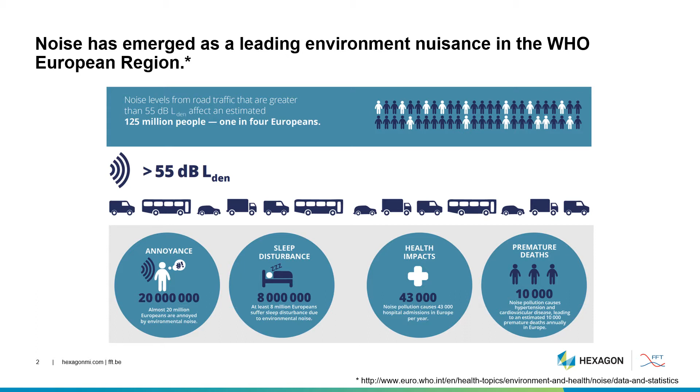The way that this has been addressed so far is by introducing regulations, especially in Europe, which has lots of different stringent regulations. The European Union cares a lot about the environment in most cases.

There has been a very strict pass-by noise limit, and we can look at this limit evolution in the following chart, where starting from the 1970s, the first legislation was passed for pass-by noise, and the limit was set at 82 decibels in the A scale.

After 20 years, the noise limit was reduced to 74 decibels, which is a very big decrease in noise pollution. After a few more years, it was further reduced in 2016 to 72, in 2020 to 70, and there will be a new regulation coming in 2024, where this will be further reduced to 68 decibels.

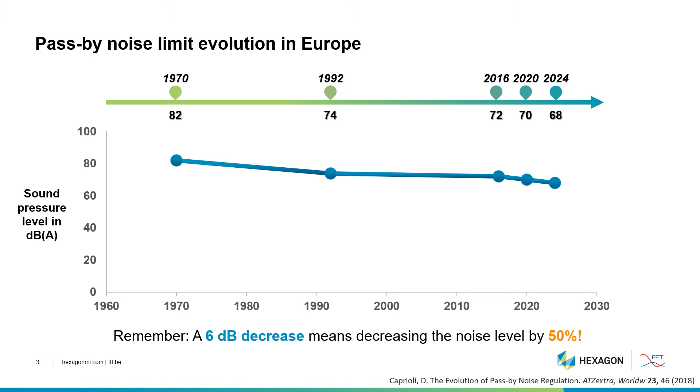So you can see that from the 1970s up to the 2020s, which is about 50 years, we have had a decrease in the noise level regulation from 82 to 68 decibels, which is 14 decibels. And you have to remember that a 6 dB decrease means decreasing the noise level by 50%. So this is really a huge effort that is being placed on reducing pass-by noise.

Now, of course, looking at this from the OEM point of view, from the constructor point of view, very often they treat acoustic design in two ways. One of these can be regulations: do we need to comply with a specific regulation to allow us to put our vehicle in the market?

And the second is that right now, very often customers, meaning drivers and passengers, treat vehicles as a product and need them to have very good acoustic performance. So acoustic comfort is treated as a feature. In any case, in this webinar, we'll talk about pass-by noise, which is mostly related to regulation.

So let us right now look at pass-by noise regulation compliance. Let's start our journey in this topic to see what the regulations are, how we measure pass-by noise, and how acoustic simulation can help us comply with pass-by noise by reducing costs and doing that even faster. Let's first look at how we measure pass-by noise overall.

This is done based on the procedure described in the ISO 362 standard, where a vehicle has to cross a 20-meter measuring zone, which in its middle has, at a distance of 7.5 meters, two microphones, one on each side. As the vehicle goes through the zone, the microphones capture the noise level.

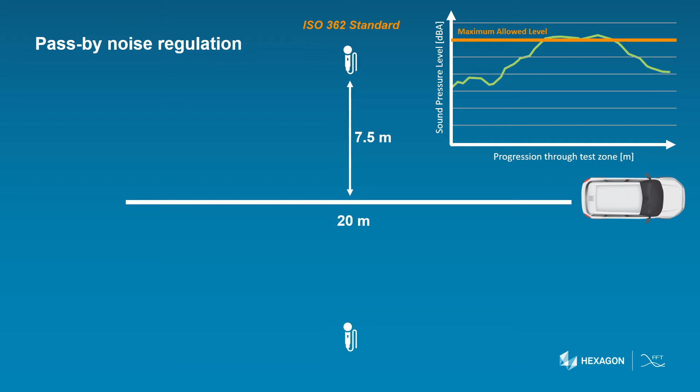The challenge is that most of the time, this type of test comes very late in the development process, because you actually need a real vehicle to do it. So this is really at the end of the process. Also, it's a very expensive test to perform—a few tracks that you will need to go to for this type of testing—and it's very hard and costly to make changes late in the development process, which is a very important point.

So we need to be able to do these types of tests a bit earlier in the process, so we can actually have compliance with the regulation once we are there and doing the test.

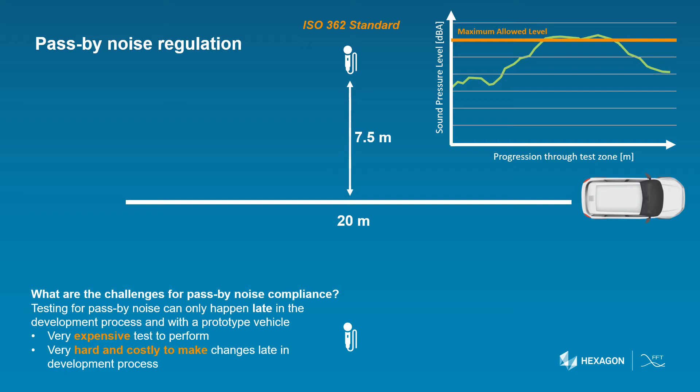Besides the full vehicle noise, we can also separate this into different parts which make noise in reality. Not everything in the vehicle makes noise, but there are some parts which contribute more to the overall noise level. This tends to be, in most cases, the engine, the exhaust, and the tires. There are also other parts, of course, but these tend to be the most predominant sources of noise for pass-by noise.

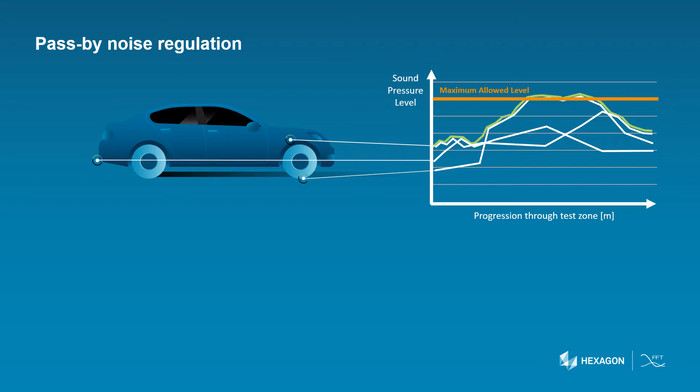Since we're dealing with linear acoustics in reality, we can easily decompose this problem, the absolute noise level that we need to find, into two specific different problems. One is related to the noise source, meaning tire noise, engine noise, exhaust noise. The second is about how this type of noise propagates to the microphone, meaning what is the acoustic transfer function - what is the pressure at the certification microphone due to an excitation from the exhaust. If we recombine those together, then we can get the absolute noise level.

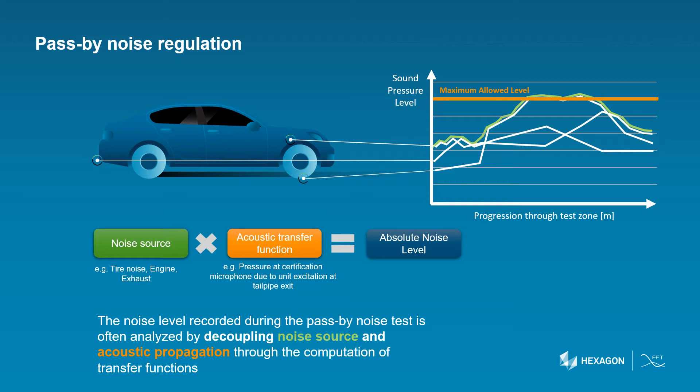This type of approach can help us be more flexible in how we evaluate pass-by noise, especially when it comes to simulation, but also with tests as well. The noise level recorded due to the pass-by noise test is often analyzed by decoupling noise source and acoustic propagation through the computation of acoustic transfer functions, as I mentioned above.

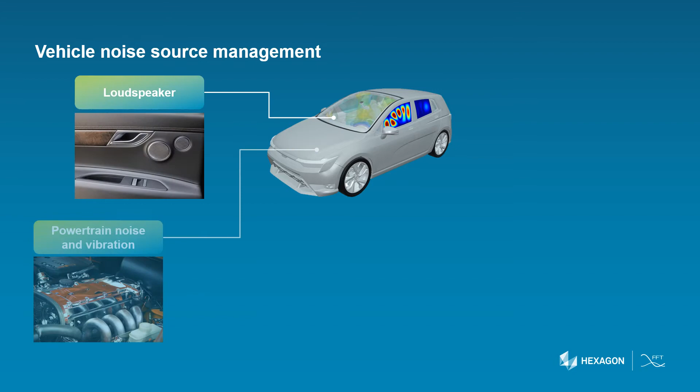Let us talk a bit more about vehicle noise sources. Here I put a number of different noise sources, but the most predominant ones in terms of exterior noise tend to be the powertrain noise and vibration, tire noise, road vibrations very often, and exhaust noise. This is because very often we can hear that, but in most cases, exhaust noise, tire noise, and powertrain noise will be the most important parts.

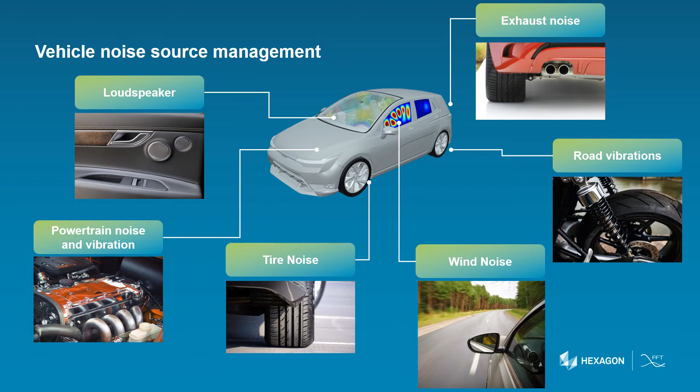Loudspeakers are mostly for the interior comfort. Wind noise is again more from the interior point of view - it's not very easy to have exterior noise that is because of the wind. So in this presentation, we will mostly talk about powertrain noise, tire noise, and exhaust noise.

Now that we have an idea about how we compute our noise sources, we can go ahead and see how we can simulate these noise sources and also the acoustic transfer functions, or how simulation can help us do pass-by noise evaluation.

At first, we need to ask ourselves, why do we need to do simulation? A very obvious answer is that since the test is very expensive, we have to do something else. Simulation can be very good at providing insight much faster. Here I have four types of topics that simulation can be used for in pass-by noise, and I will explain each of those separately in the next few slides.

The first one is that we can go easily from component to the system, meaning we can test individual components, individual parts, as well as the complete system. Simulation can provide us with a way to do easy source recombination, meaning we can have some dedicated utility that allows us to do specific recombination between different noise sources and different acoustic transfer functions. It can provide deeper insight and allow us to test virtual solutions. Also it can provide results faster and most importantly earlier in the process, so we can take further decisions about how our product will behave in terms of pass-by noise.

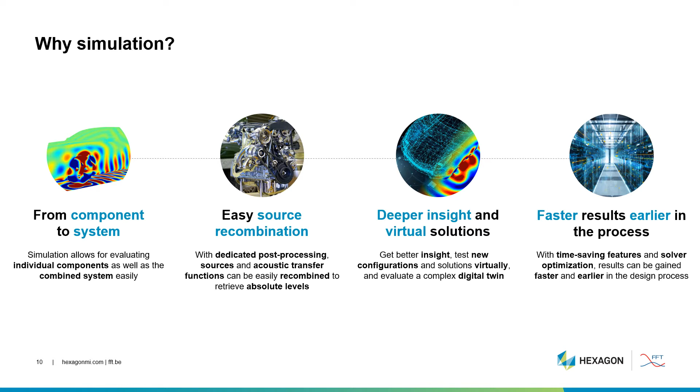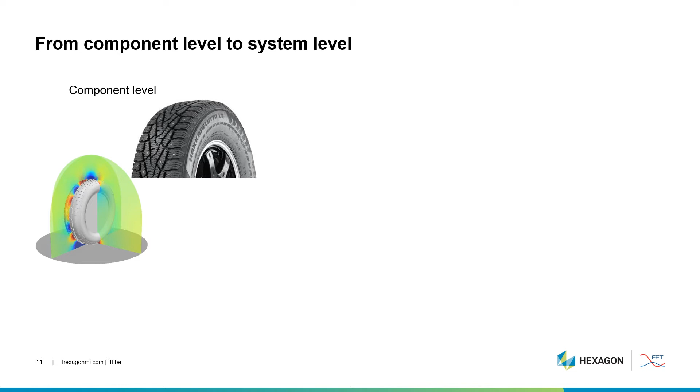Let's look first at the component to system level. In simulation, we can easily do a type of component level simulation, meaning that we just put the component in an isolated environment and we see what is its performance with respect, in this case, to noise. But the performance of a component in an isolated environment is not the same often as when we install it in the actual environment.

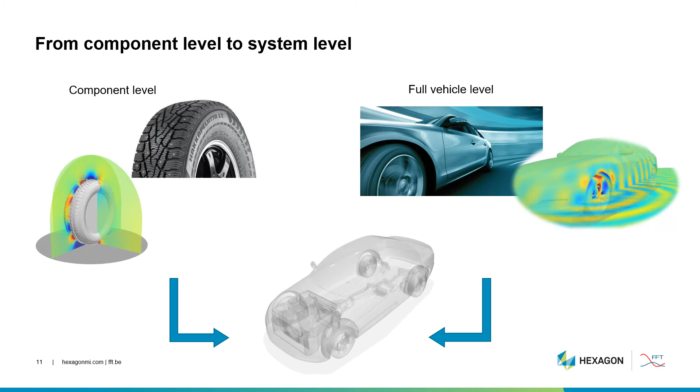For example, if we put a tire in its position in the vehicle, this gives us an idea of having both types, both the component level and the system level, so we can see how the component works both in an isolated point of view and do modifications there if we need to, and also how it performs inside the actual system. We can see how it performs there and do some modifications. Overall, the simulation allows us to go both into the component and the system level point of view.

About source recombination, which I mentioned before, here I talk a bit about this specific utility that we can have. Since 2021, Actran features a utility that can be used for source recombination. It's called the Actran Workflow Manager.

So this workflow manager can take into account various different sources, such as powertrain noise, intake and exhaust noise, as well as tire noise. It can also take into account the microphone position, the test track information, the pass-by noise setup. And at the end, we can compute transfer functions around the vehicle. So we have all the necessary ingredients to perform a pass-by noise analysis.

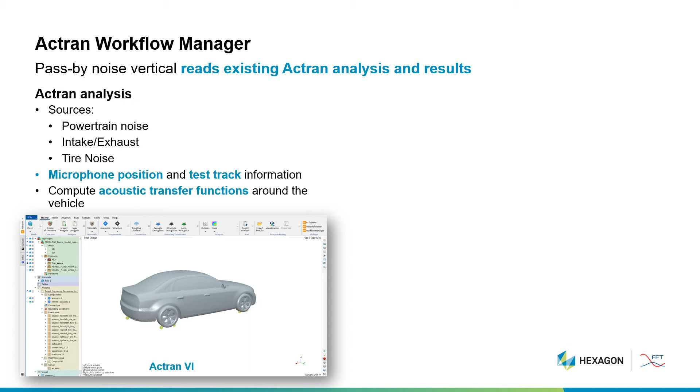But then we need to take all of this and put it together, and this is what this workflow manager is able to do. So what it does is it takes some information from both simulation and tests, if you have them available. It can perform recombination to obtain the noise levels, identify problematic noise sources and paths, and perform what-if scenarios to reduce pass-by noise.

And all of this has nothing to do in reality. In this case, with simulation, we just take all our inputs. Some of those come from simulation, some of those may not come from simulation, and put them together, so it can be used by a non-expert person, by a person that does not really know how to use simulation.

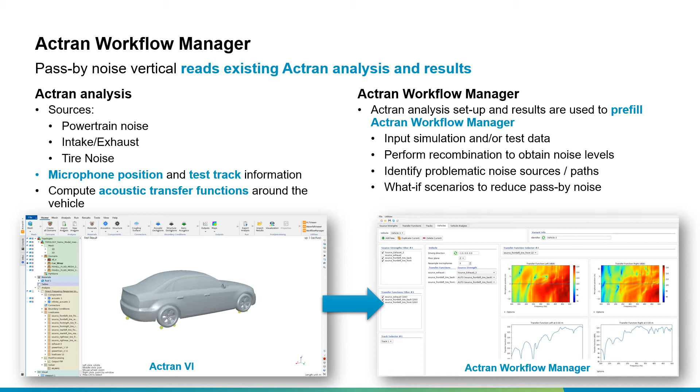The third topic was about deeper insight and testing virtual solutions. So the thing about simulation is that it can provide us with a very large amount of outputs. Measurements tend to have only one output, meaning that you just have the pressure on the microphone for the test.

It does not really tell you what contributes to this pressure. It doesn't really tell us how this pressure comes from the vehicle up to the microphone. And these are all things that simulation can provide insight on, meaning which components radiate the most, how noise propagates,

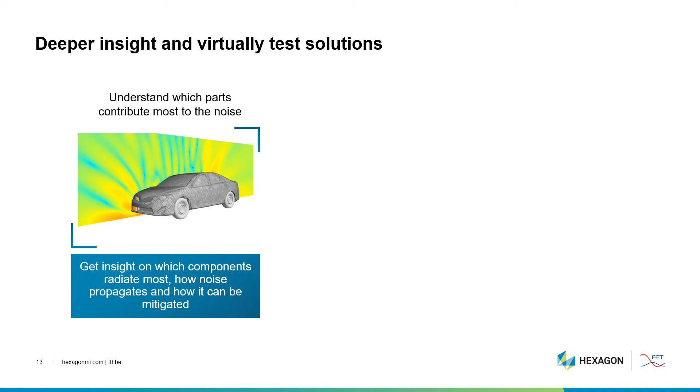and of course give us ideas about how it can be mitigated. After we have an idea about all of that, then we can try to apply solutions and test them virtually. We can test possible mitigation techniques such as acoustic treatments by adding them into the simulation model and evaluate the performance.

So we can very easily test new solutions virtually directly with simulation. This is a very big advantage, of course. We can see very easily if now our vehicle can comply with the regulation or not, by just modifying a few things.

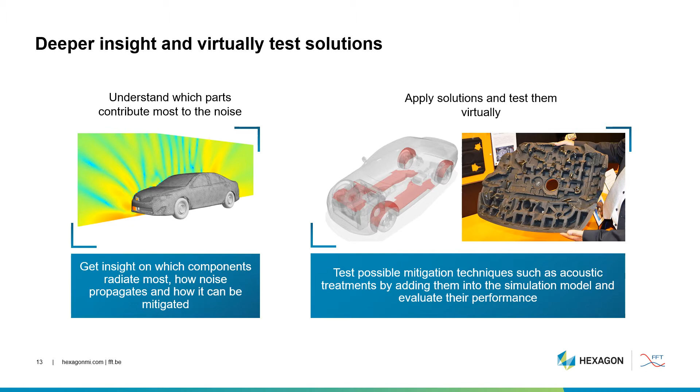And finally, of course, the main advantage of simulation is that it can provide results fast and early in the development process, and as I will show you later, with quite a good accuracy as well. But let's talk a bit more about having fast results.

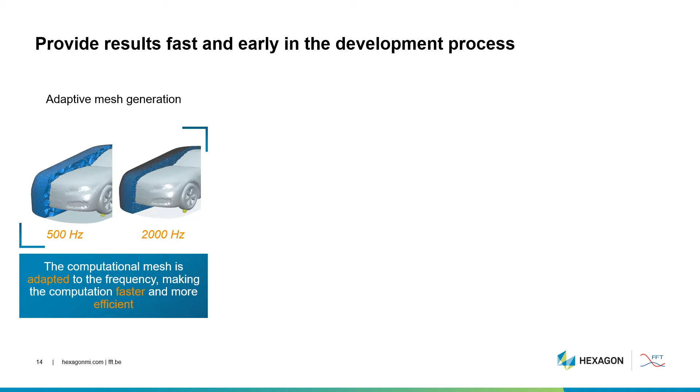An important thing that we could have is that very often the meshes of the simulation depend a lot on what is the frequency. And if we just use meshes that are only available for higher frequencies—of course these are valid for lower frequencies as well—then it takes a large amount of time. So having an adaptive meshing generation technique, where the computational mesh is adapted to the frequency, this can make the computation faster and more efficient overall.

Then we have some solver optimization, where specific settings of the solver can allow us to reduce calculation time maybe up to 3 times or even more. And of course, by using parallelism, meaning a multiple amount of cores, then we can get solutions much faster, in a very much industrial time frame, maybe even 1 day or 2 days, depending on what is our target model and our target frequency.

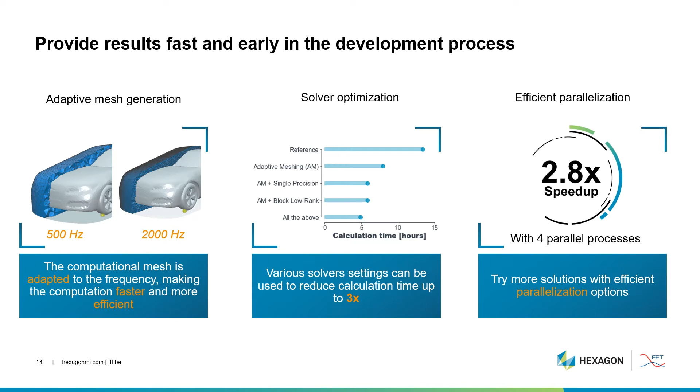This sounds all good and nice for simulation, but what are some of the challenges as well? Well, simulation is also facing a number of challenges, and some of those come with replicating the measurements, meaning can we do the same thing as the measurements but in a more efficient way?

We have to tackle larger models in real life when we do our tests. If you have a truck, a big truck, or a small car or a motorcycle, it doesn't really matter what is the size of the model. You can definitely measure that, but in simulation we have challenges in that space.

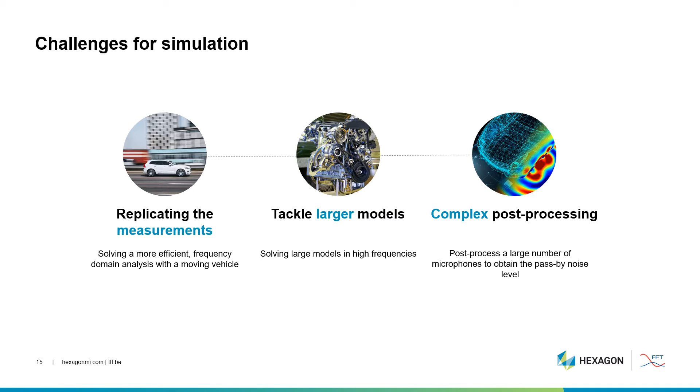And also, pass-by noise can be quite complex to post-process in simulation. So there we need to have a way of mitigating this type of post-processing and creating a very easy way to do that. Let's look at all of those and maybe what are some solutions to that.

For the first topic, which is replicating the measurements, well, let's go back to how we measure pass-by noise. And again, we have our 20-meter test track. We have our vehicle that will come through that part, and then it will pass through those two microphones that are away from the test zone. And we will measure again the sound pressure level with respect to the progression through the test zone.

However, this is very easy to do in measurements and in real life where we all move ahead in time. But simulation tends to be more efficient when we work in the frequency domain directly, and having a moving car in the frequency domain does not tend to be very efficient for simulation. So what do we do instead?

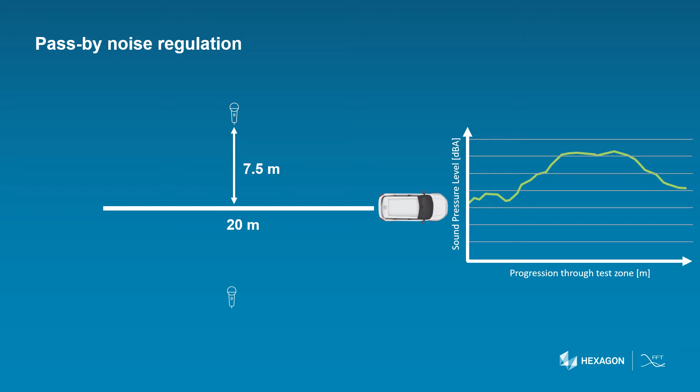Instead of having the vehicle moving, we treat the microphones as moving. We're trying to replicate an indoor pass by noise measurement procedure. So instead of doing an outdoor procedure, we replicate an indoor procedure where the vehicle is fixed in an anechoic room, with microphones all around it. With some clever post-processing, taking into account the phase shift of the microphones, we can get our pass by noise curve, and it's the same as the one from the previous measurement technique.

However, this brings an additional problem of post-processing, which is how we handle the number of microphones that we have to post-process. This can become quite tricky to do if you're not familiar with how this works.

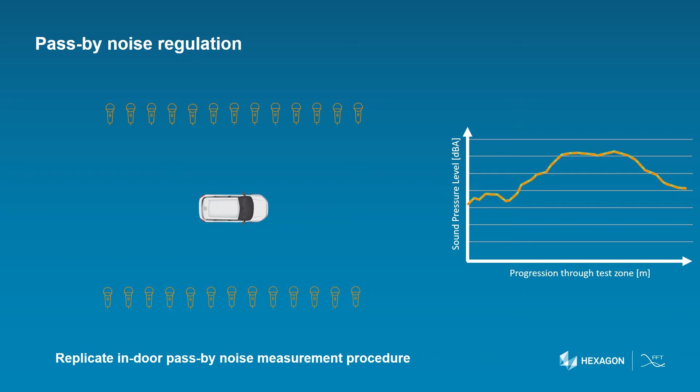The second part was about tackling larger problems. What do we mean by larger problems? Well, in most cases, it means a larger model, a larger vehicle. Instead of going through pass by noise simulation for a car, we go through it for a truck, which again needs to pass specific regulation to be certified.

Or it can be that we want to go higher in frequency. Very often, pass by noise is treated from 2000 to 4000 hertz, but OEMs often want to go higher, to 5000 hertz or more. This can become very tricky because we have a large model, and we have to fill a large volume with finite elements at least. Computational time can become prohibitive, as well as the resources we need to run this type of simulation.

An alternative is to use a different type of solver, and this comes in the form of the DGM method.

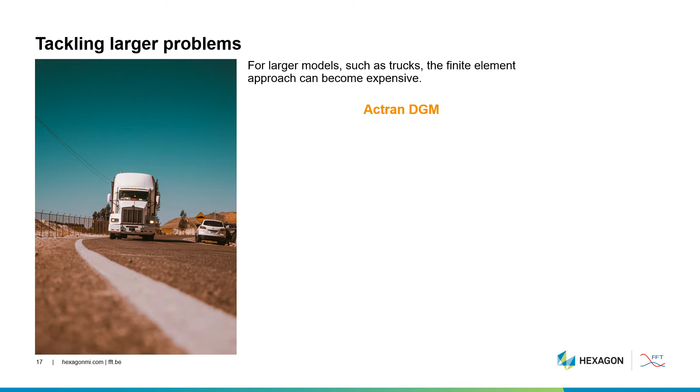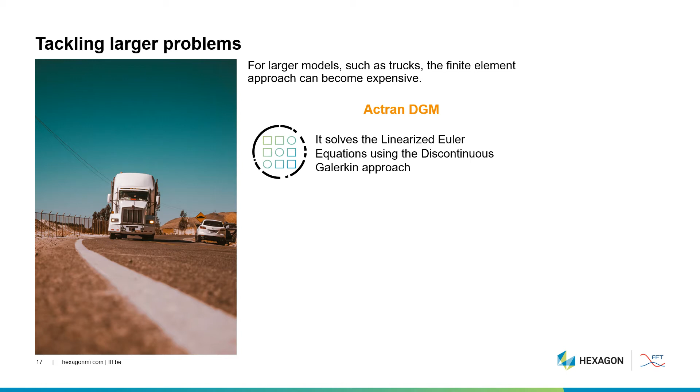So in Actran, we have the DGM solver, which comes from the discontinuous Galerkin method. This solver solves the linearized Euler equations as opposed to the Helmholtz equation for the frequency domain classic solver. It can be efficiently parallelized in many core architectures, and it also features GPU acceleration, so you can have results very fast thanks to very good optimization of the solver in parallelism. It can also tackle large models at high frequencies because of the nature of the high order discontinuous Galerkin method and the equations we solve for that.

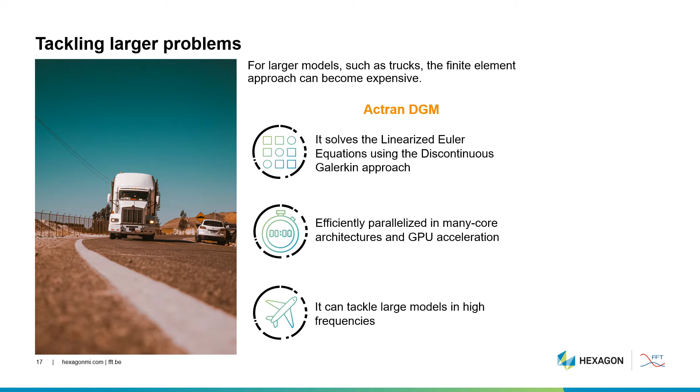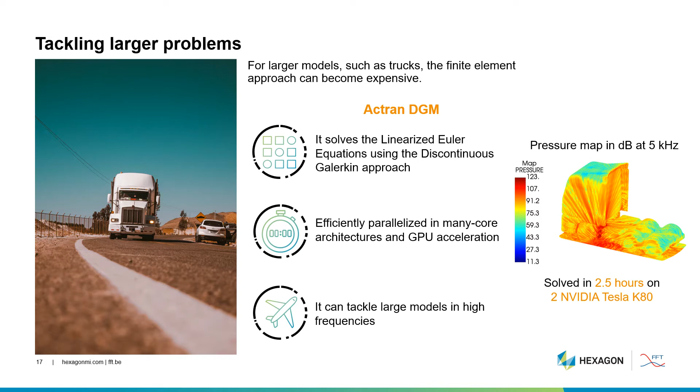To give you an example of what can be done with this method, here is a pressure map in decibels at 5000 hertz of a full truck. This was solved in just 2.5 hours on two NVIDIA Tesla K80s, which is a slightly older graphics card from NVIDIA. With newer cards, this will be even faster. So this can be very easily done if you want to go away from a classic approach. If you go to higher frequencies, it's easy to use this type of method to get results for pass by noise in a very good time frame as well.

Finally, as discussed before, there's the number of microphones that we now have to post-process. If you have to do this manually or with a script, this can become easily confusing, and it's not at all user-friendly in reality. It's not easy to do. You don't want to focus on doing the post-processing; you want to focus on seeing the results and changing things to make the vehicle comply with pass by noise.

So in Actran, we also have an automatic pass by noise post-processing output request, which is based on the IEC 61672-1 norm. This allows us to get a fast assessment of pass by noise performance by doing this post-processing automatically and just getting the results at the end of the simulation.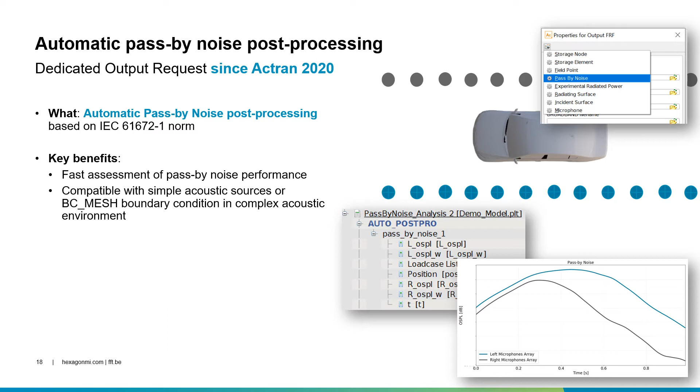So far we have discussed pass-by noise regulation: how do we measure that, why should we use simulation for this type of process, what are the challenges for simulation, and what are some possible solutions. So let's now talk about what are the essential components and how we can actually perform this type of simulation.

To start, of course, we need to have an idea of our noise sources. We need sources that come from measurements, 1D simulation, or 3D simulation. We can also use sources from different components that can be evaluated in one simulation thanks to a specific process that's available in Actran.

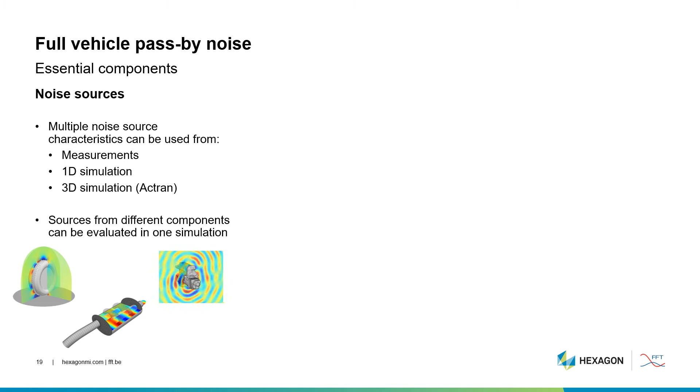We need to have our acoustic transfer functions, which can be automatically computed in Actran using the car geometry model, monopole locations (the source locations), and the pass-by noise output request. We can also use acoustic treatments directly in this model to assess their efficiency, checking with and without to see the difference the treatments make.

So right now we have our two basic components: we have the noise sources, and remember that we need to combine the noise sources with the transfer functions. So we need a way to get the absolute noise level, which is the recombination of the source definition and the acoustic transfer functions as a function of the vehicle driving conditions—allowing us to compare the impact of driving conditions on the final pass-by noise level, as well as isolate potential issues and define acoustic countermeasure strategies.

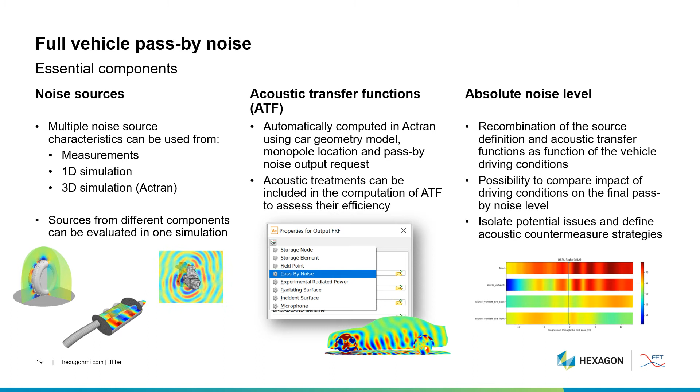So at the end, we have all of these essential components and can start doing our simulation. Let's go through each of those specifically to see their nuances and their points.

Let's start with the noise source. For the noise source, we normally have noise sources in two different ways: either in the frequency domain or in the time domain. In the frequency domain, most often they come from an engine simulation at a specific RPM, and at the end we can have this type of waterfall plot where we can see the noise between frequency and time for our engine.

We can also have a tire noise spectrum, or in reality any other type of excitation in the frequency domain. It just has to be a signal in the frequency domain, and we can use that as a noise source very easily.

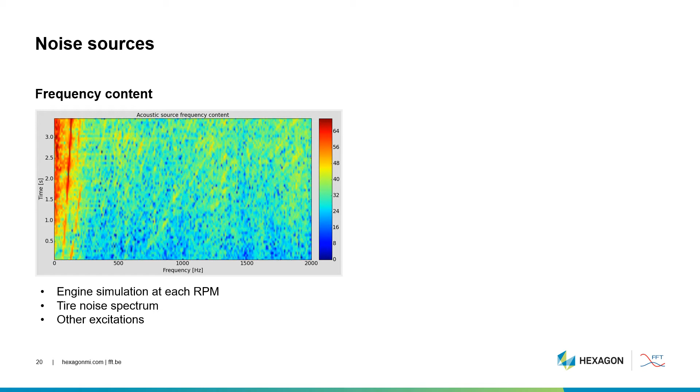The second type would be in the time domain, meaning we have a time signal. Most often this comes either from a 1D CFD simulation for exhaust noise, or from measurement data—there are other sources too, but it doesn't really matter where it comes from. It just matters that it is acoustic pressure versus time, and this can be readily used in our simulation. So these are the noise sources we can use directly.

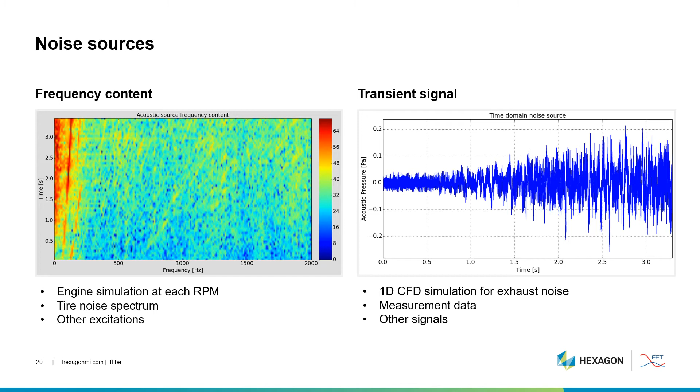Now about the acoustic transfer functions—as the words say, this is a transfer function, meaning we put a unitary excitation to see how the noise goes from the source up to a measuring point, normally a microphone. Most often that means we use unit sources with an amplitude of 1, and in lots of cases we use monopoles as the first approximation. It doesn't mean we have to use only monopoles—we can use any other type of noise source—but monopoles serve as the first approximation.

For tire noise, we can use a more expensive simulation that comes from a nonlinear solver and so on. For the exhaust, it's similar—we can also take into account the 3D simulation of the complete exhaust system to use as a noise source in the pass-by noise simulation. All of these noise sources can be used in one calculation using the multiple load case capability in Actran.

And of course, we need a way to automatically create the exterior acoustic mesh. This will allow us to be much faster, as I'll show in a bit, as well as make it easier for people to use this tool. This exterior acoustic mesh that's created automatically can be adapted to the frequency being solved.

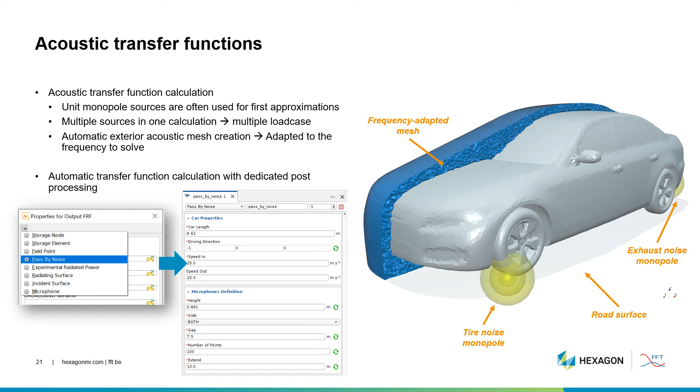I'd like to focus a bit more on adaptive meshing and high-performance computing for pass-by noise simulations, mostly because they tend to be very expensive overall, as I'll show you in a few case studies later on. It's very important that we can solve these not in a week or more, but during the day, so we can do many more iterations of our configuration. The first point is the adaptive mesh, which I briefly touched upon before.

Adaptive mesh means that for specific frequencies, we use a specific mesh. The reason is that if we want only one mesh, it needs to support the highest frequency, which is overkill for lower frequencies where the wavelength is much larger. So instead, the solver automatically generates different meshes for different frequency ranges, each adapted exactly to that range. This makes the calculation much cheaper at lower frequencies while keeping the cost correct at higher frequencies, optimizing the calculation for the specific frequency range.

Going on to see how this applies and how we can add more optimization to our solver, I'm showing this plot where the reference model is the 2000 hertz model on the left, used for the complete frequency spectrum from maybe 10 hertz up to 2000 hertz. This takes about 13 hours and 20 minutes to run. If we just apply the adaptive meshing procedure, we can reduce that by 5 hours already, down to 8 hours. Still, this is almost an overnight calculation time, meaning we put it in the afternoon and come back in the morning to see the result.

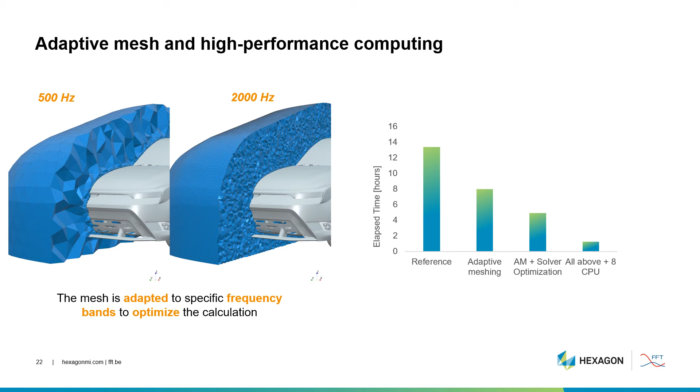If we then add 8 CPUs, just 8 CPUs, we can reduce the simulation from 13 hours and 20 minutes to about 1 hour and 10 minutes, an 11 times speed up. This is for a pass-by noise analysis up to 2000 hertz. So we can run not just one pass-by noise simulation during the day, but make modifications, change things, add things, and run it again and again, at least a few times per day. This helps increase productivity for pass-by noise simulation.

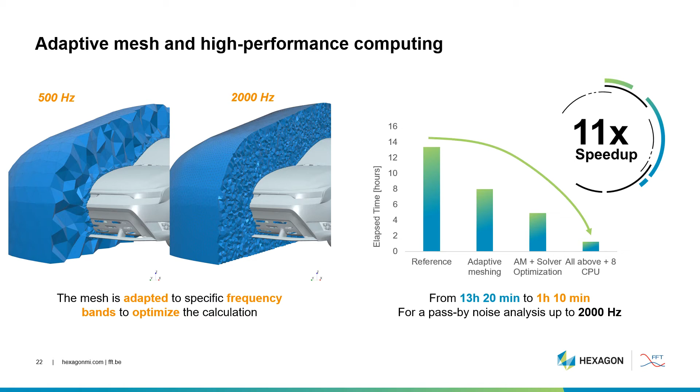Finally, the last part of these simulations is post-processing. And post-processing is not just about getting acoustic transfer functions or pass-by noise levels, which give an idea of results, but we also need a further idea of how we can improve these results with respect to the maximum allowed levels.

It can also provide the absorption from acoustic treatment added as a countermeasure. And at the end, we can listen to the noise the vehicle will make. We have this auralization technique that lets us take the signal, convert it to an audio file, and listen to the noise it produces.

That might sound a bit odd, but very often in pass-by noise simulations you want to reduce the pass-by noise level while still keeping a specific signature sound that the vehicle makes. So it's very important for quite a lot of brands to have this possibility of listening to the noise.

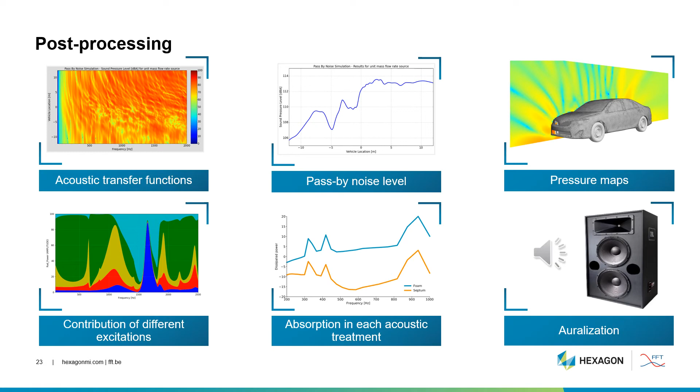You saw in the previous slides how to do these simulations. I did not talk about source recombination, because I want to spend specific time talking about the workflow manager, because this tool can allow us to have a much easier way of recombining the sources and seeing what could happen for different types of sources and acoustic transfer functions. So let's take a look at this.

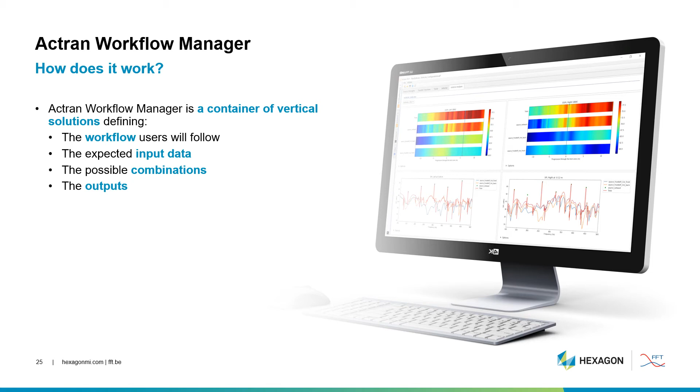What is the workflow manager and how does it work? I talked about it a bit before, but what it is in reality is just a container of vertical solutions where we define the workflow users will follow, the expected input data, the possible combinations, and at the end, what the outputs are.

Currently, in the current version of Actran, we have two types of verticals available. One is for pass-by noise, which is the topic of today's webinar, and the second is for electric motor noise, which can also be interesting for automotive OEMs. Let's see how the pass-by noise vertical works.

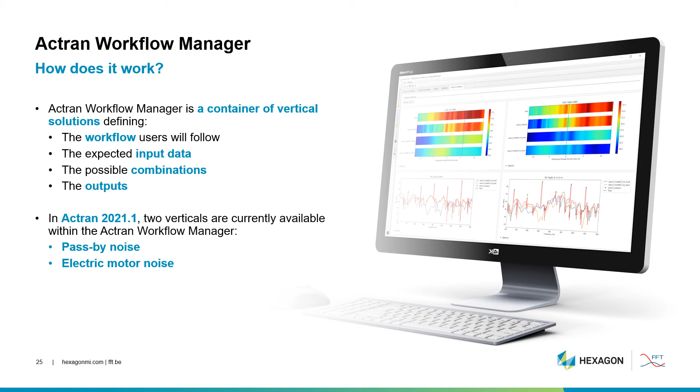The workflow of the pass-by noise vertical is split into five different sections, representing a storyboard where you go from one to the end. As the first step, we provide the source strengths, and in the second, we provide the transfer functions. We provide information on the vehicle and the track, and at the end we do our analysis in the last tab. So we have a tab-based approach where you go from the first tab to the last to get your results. Let's see each one specifically.

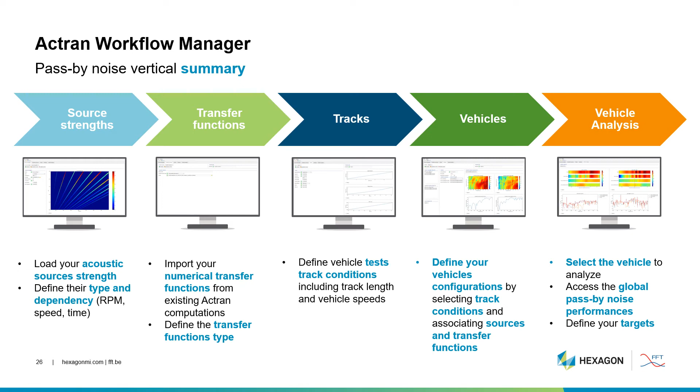In the first tab, we can provide the source strengths, which can be in the form of tire noise, exhaust noise, it doesn't really matter. What matters is that it is either in the frequency domain or the time domain. You can also provide the dependency with RPM or with speed, so we have lots of different options for how we can provide the noise sources.

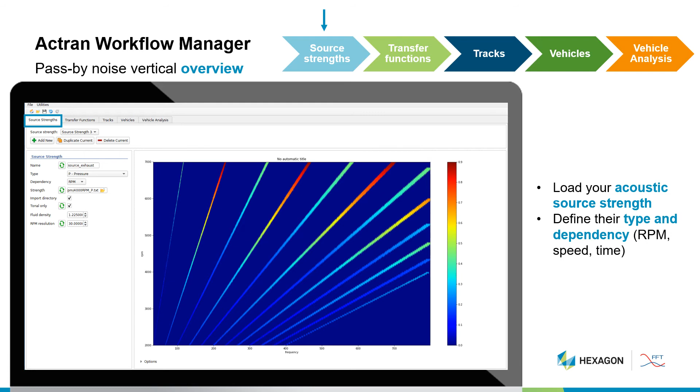After that, we can provide the transfer function information. This can come from Actran by importing a PLT file that contains the transfer functions, and we can also define what this transfer function is in terms of pressure to pressure, pressure to mass flow rate, and so on. So we have a number of different combinations possible for the different transfer functions.

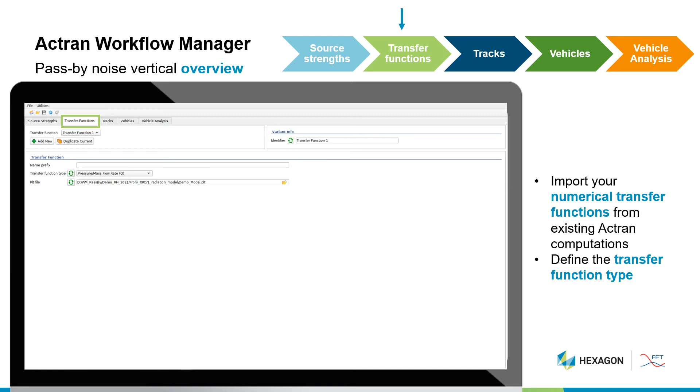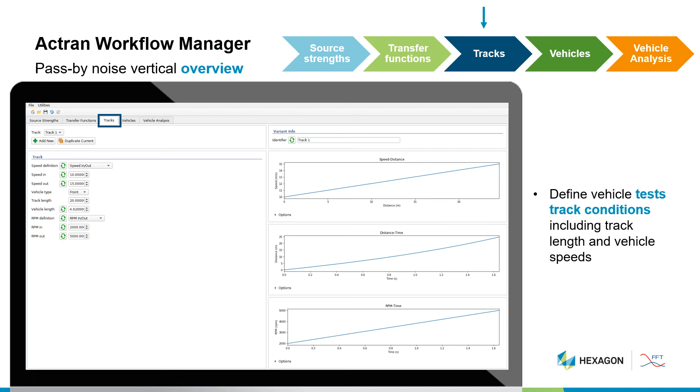Once we've done that, we can provide the information on the track, such as the speed of the vehicle, the track length, and the vehicle length. We define the track conditions. We define a number of vehicles, and the reason for this is that we can have various different combinations of sources and try to see these what-if scenarios.

So what if we do this? What if my vehicle looks like this? What if my vehicle behaves like that? We can define different vehicle configurations by setting track conditions and source and transfer functions. So here we select how we combine our sources, transfer functions, and test conditions.

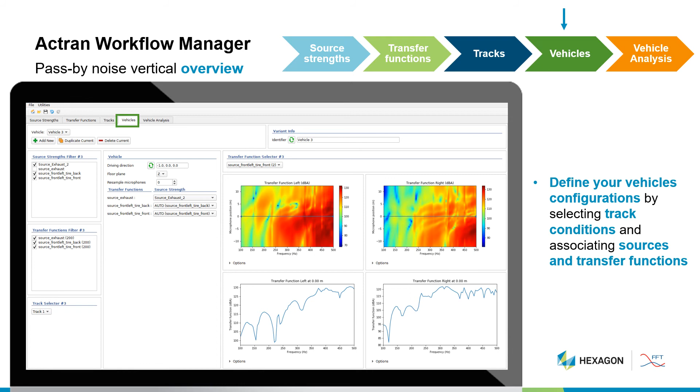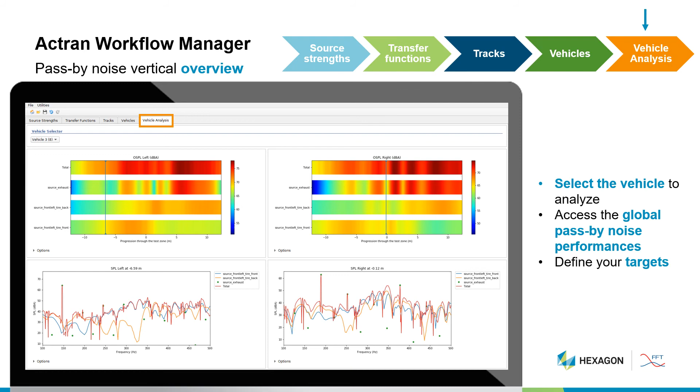At the end, we go ahead and perform the analysis. Here we can select the different vehicles to analyze. We can get a contribution plot, the one you see at the top, which shows the total contribution of the noise as well as the specific source contributions. We can assess the global performance for pass-by noise, and also define our targets for that.

So this is how this works in terms of the source recombination. You can see that this is a very powerful tool that can be used also by non-experts of simulation, which can be a very important asset when creating pass-by noise simulations.

So what are some of our successes? I've talked a lot about what we can do and how we can do things, but how have we applied that already in the field? Here we'll talk about a few case studies, some longer, some shorter, to showcase how we have done pass-by noise with Actran in the past.

The first test case comes from Renault, the numerical assessment of a car pass-by noise, presented at our conference in 2016. Here, what they wanted to know at Renault is how the transfer functions behave. They wanted to evaluate the acoustic transfer functions for a quite large vehicle. We have a number of different sources, as you can see here, and a specific test zone shown at the top of the slide.

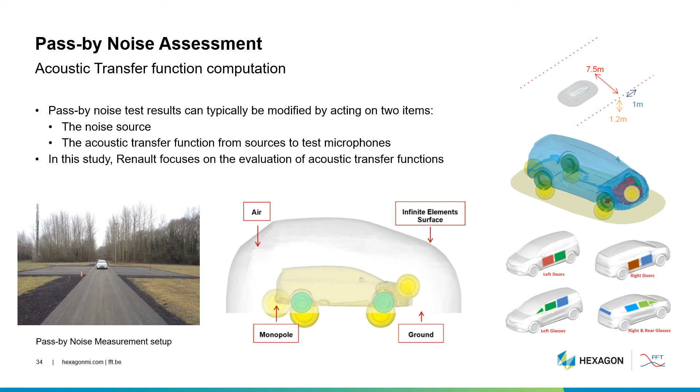The important thing about this test case is that transfer functions are computed for this car up to 5,000 hertz, so this is a quite high frequency simulation. To cope with that, they created three different models: one for the low frequency, one for the medium frequency range, and one for the high frequency.

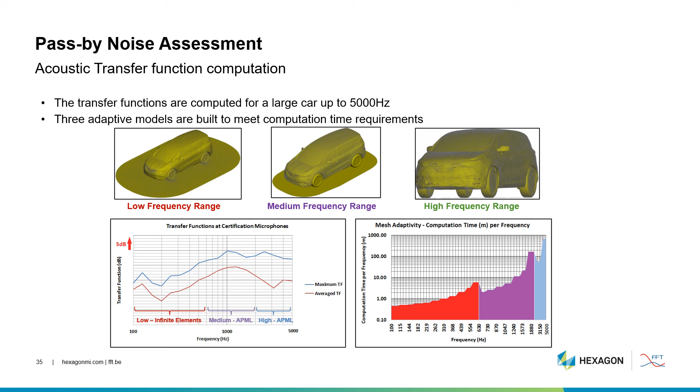The reason for that is you can see in the plot at the bottom right that the cost starts increasing as we go up in frequency, and once it becomes too high, we switch to a different model, and this repeats again and again. But if we imagine just using the last model up to 5,000 hertz, the cost would always be this high for each frequency, so it would be very, very expensive.

For them, it was important to assess the geometry and/or acoustic treatment modification influence on the acoustic transfer functions, but to do that at low computational time. This was enabled largely by mesh adaptivity.

Some of the key features, according to Renault, were the adaptive exterior acoustic component, meaning we can modify our exterior mesh with frequency, the multiple load case computation capability, meaning we can put various different noise sources together and evaluate them independently, and also the post-processing capabilities.

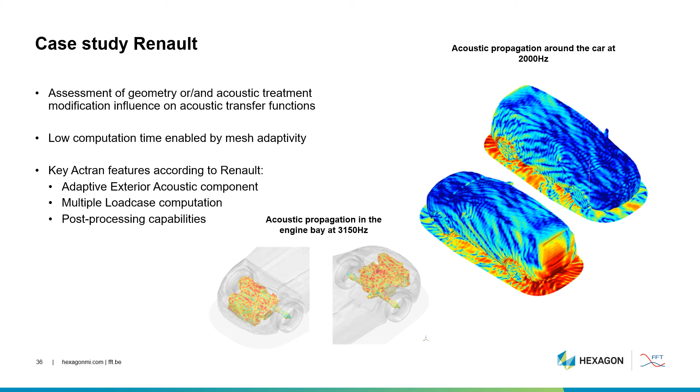Let's now take a look at the second case study, which is about how Autoneum and Jaguar Land Rover consider the design complexity of engine encapsulation. For those not familiar with this term, engine encapsulation is when we apply a number of covers on an engine to essentially dissipate noise.

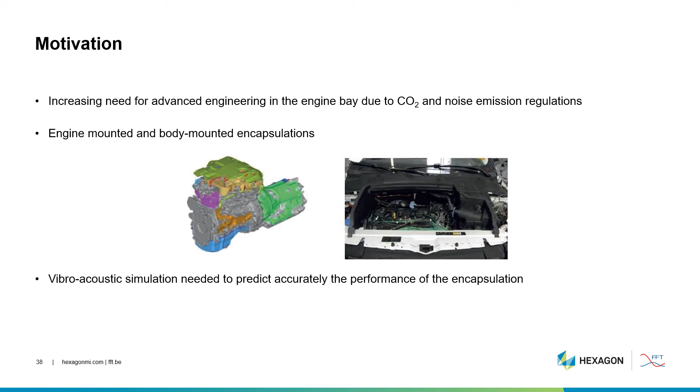Here they use engine-mounted and body-mounted encapsulation. To do this type of test and measurement, we need to use a vibroacoustic simulation to accurately predict the performance of the encapsulation, which could include both solid materials such as aluminum, as well as elastic materials and trims.

For this case, the simulation setup was the wrap mesh of the vehicle, with a unit velocity excitation on the engine surface to calculate the acoustic transfer function. A 3D representation of the acoustic treatments and the exterior acoustic mesh was created with an adaptive, perfectly matched layer. They considered the simulation from 400 hertz to 2.5 kilohertz with a 15 hertz step, and the total computation time was 12 hours.

This is still in the overnight range of time. Here they have used a large amount of acoustic treatments, as you can see, not just around the engine, but also in the floor and of course in the engine bay.

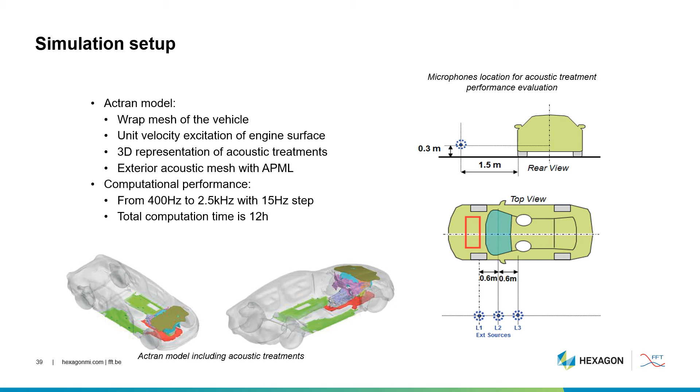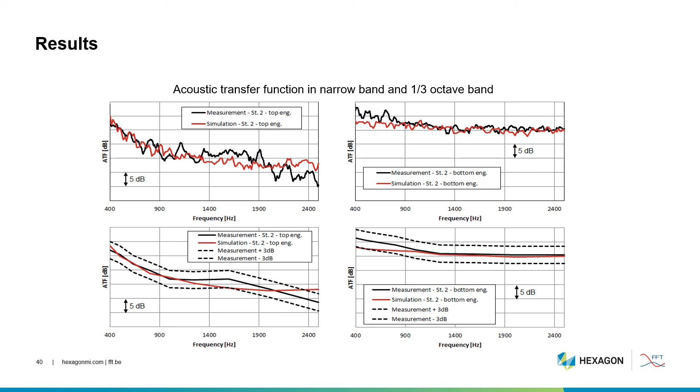What I want to showcase with those two cases is that we can have very fast results in a very efficient manner, but at the same time they're very, very accurate. It can help give us confidence in the model so we can do our modifications and what-if scenarios.

Some final case studies. These are just going from a smaller vehicle to a larger vehicle, as you will see. I will start with the pass-by noise for motorbikes.

This is the case for Royal Enfield, motorbike constructor. What they wanted to do was come into the European market, so they had to respect the pass-by noise regulation in Europe, while still maintaining the specific signature rumble that the Royal Enfield motorcycle does.

So what they did is they used a simulation that combined Adams Car, MSC Nastran, and Actran to help predict noise levels from the three dominant noise sources: the air intake, the engine, and the exhaust line. At the end, they found they had better predictability for their new vehicle launch cycles, meaning they could have a more consistent way of evaluating pass-by noise.

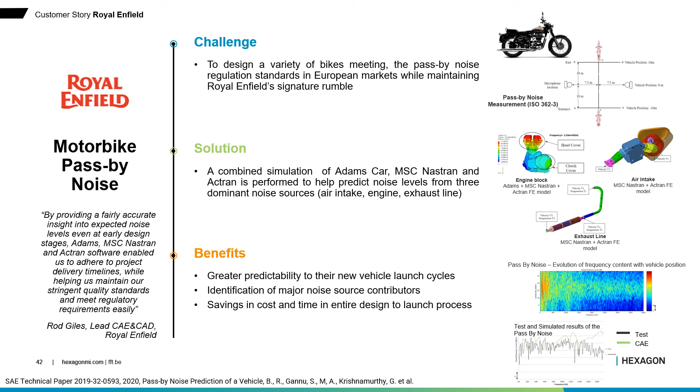They could identify major noise sources, and they could also save cost and time in the entire design to launch process, where they have very accurate results.

Going into a vehicle, this is the case of Subaru, the more advanced case of pass-by noise where we combine pretty much everything. Not just what happens in the exterior of the car, but also what happens in the interior, which sometimes can have an effect since we can have some damping there that can actually change how pass-by noise is emitted.

In this case, they created both an exterior acoustic model as well as a structure and interior acoustic model. They identified the noise sources by measurement, and then in a four-step process, they did the exterior propagation, the body transmission, and the interior propagation at the end to get the interior noise and exterior noise simulation.

At the end, they were able to have very good predictions during the development stages of the vehicle, and at the same time provide countermeasures and evaluate their performance.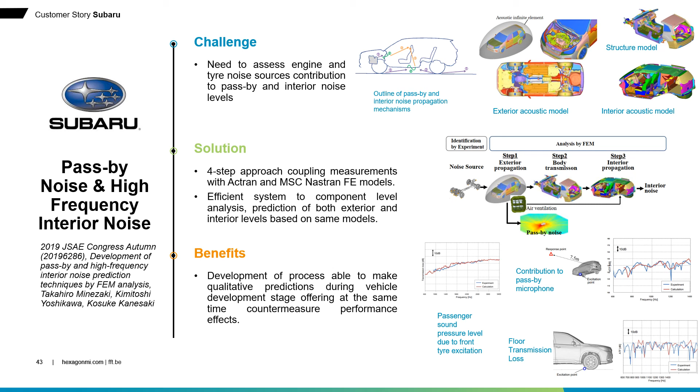The next step will be to go ahead and reach this 4000 hertz target that they already have. So you see that HPC and adaptive mesh can become a very important tool when we want to reduce the computational time of our pass-by noise simulations, even for relatively large vehicles.

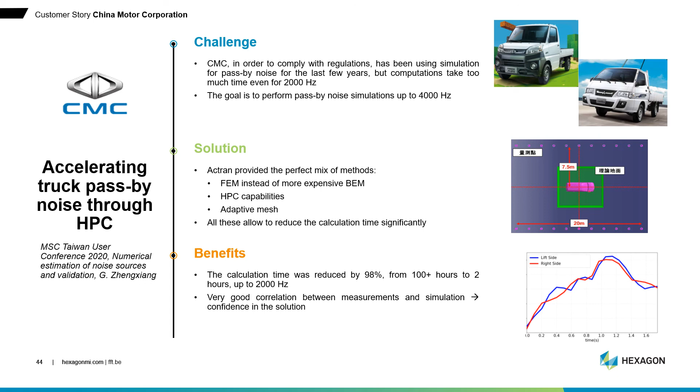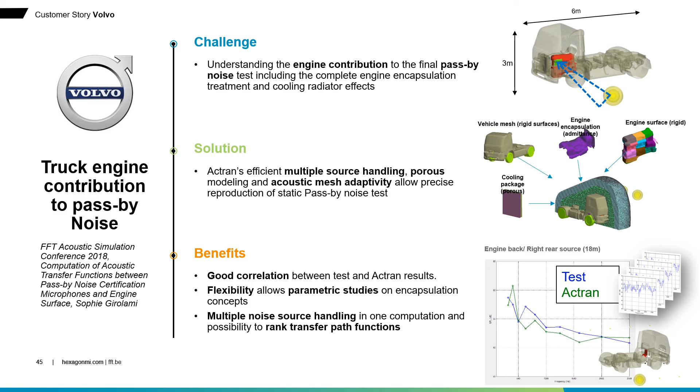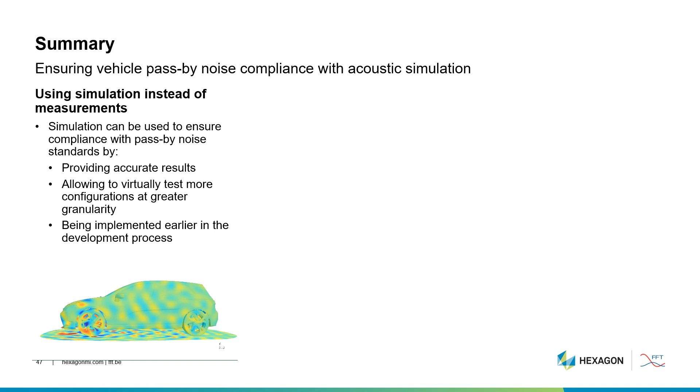To summarize what we have seen here, simulation can be used very effectively instead of measurements, as it can provide accurate results, allow us to virtually test more configurations at greater granularity and with better insight, and also be implemented earlier in the development process. So it can be a very big asset for this type of pass-by noise analysis.

It can provide an efficient and fast approach by utilizing adaptive meshing for faster computations, by employing state-of-the-art solvers with excellent parallelism capabilities, and also providing the appropriate solver for each problem, such as when to use the classic frequency domain solver versus the high order discontinuous Galerkin solver for larger models and higher frequencies.

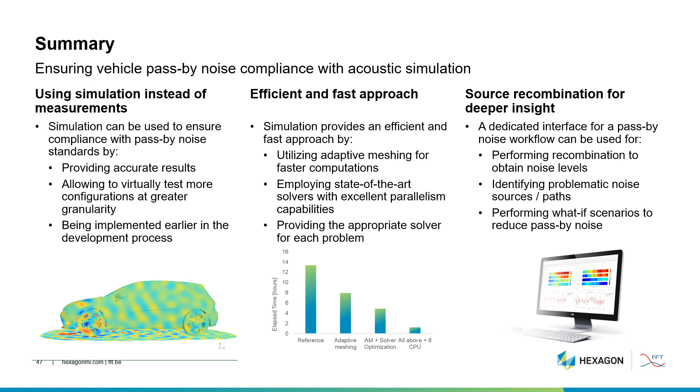Finally, we can have a dedicated interface for pass-by noise, where we can perform the recombination of noise sources and acoustic transfer functions to obtain the noise levels, identify problematic noise sources and paths, and also perform what-if scenarios to reduce the final pass-by noise.